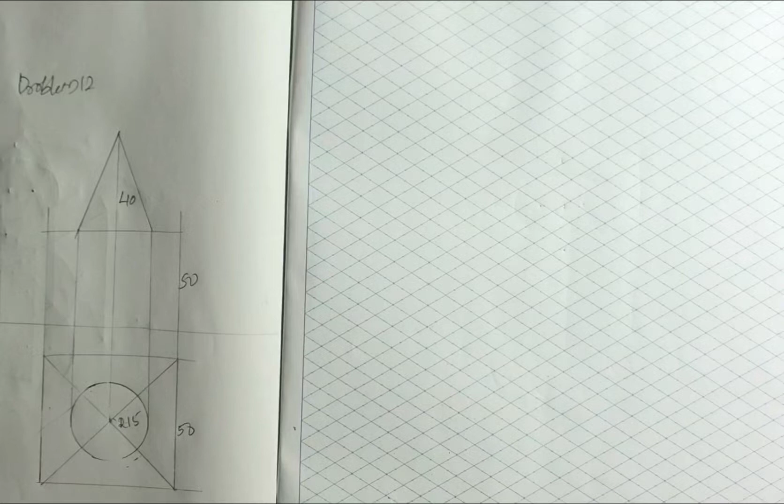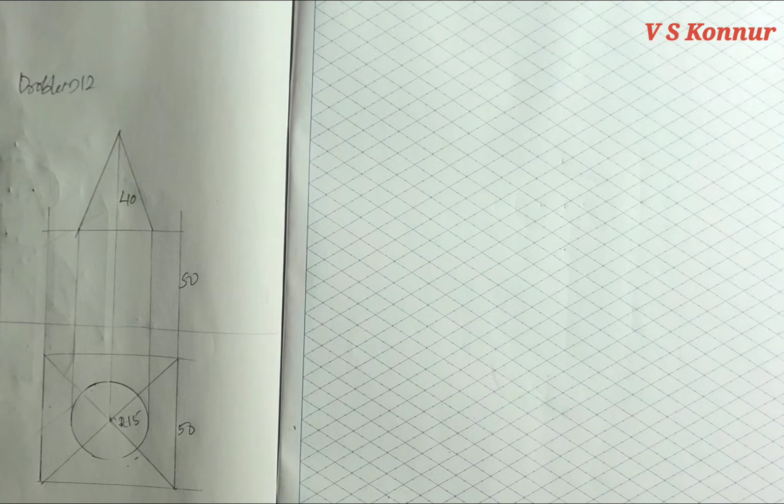This is problem number 12. There is a 50 mm cube, having 50 side and height also 50. At the top of the cube, a cone is resting. The cone has a height of 40 and a radius of 15, that is, the diameter is 30. This front view you have to draw at the beginning by taking the plan.

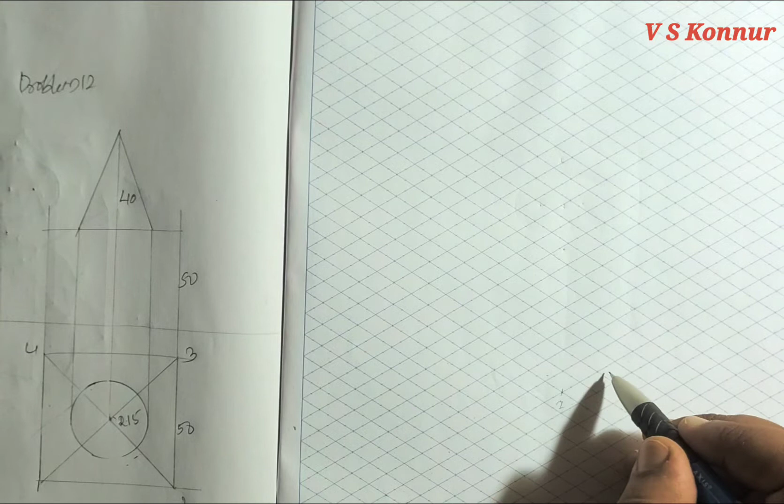First I will mark points here 1, 2, 3, 4. So here you can mark the first point. First I have marked, and it is having a distance of 50 millimeter on all the sides. 5 boxes you have to select, marking 1, 2, 3, 4, 5 on all sides.

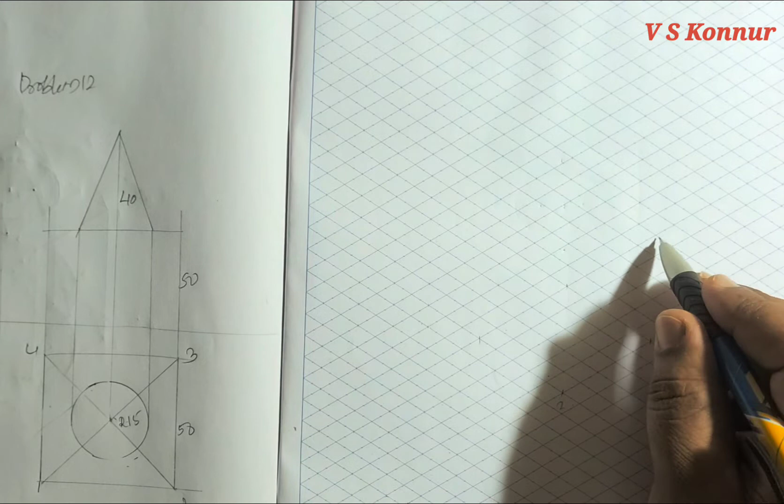And then join with the thin line. Also the height is 50, I will explain that here only. So from here if you want to take 1, 2, 3, 4, 5, and from here also 1, 2, 3, 4, 5. Exactly at this point we'll get it.

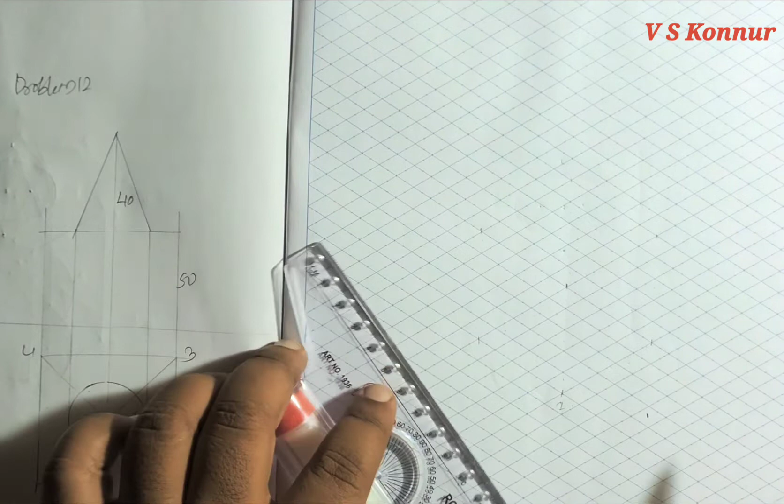So first we'll join which are important and which are visible outside. To avoid the number of construction lines, I'm just drawing these points.

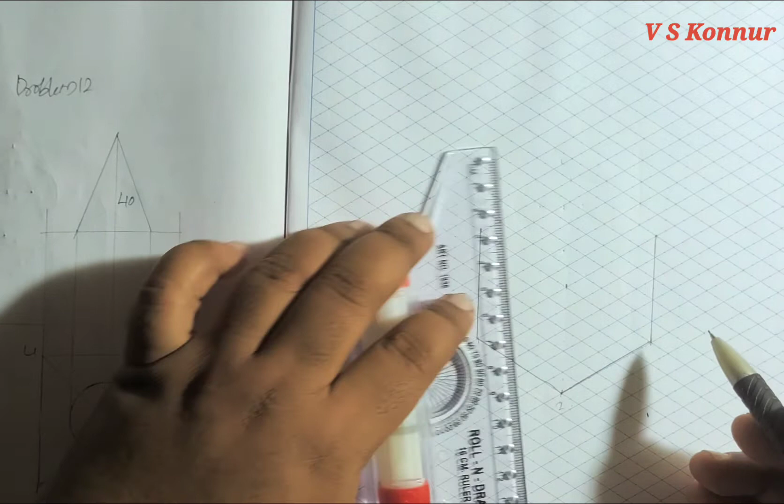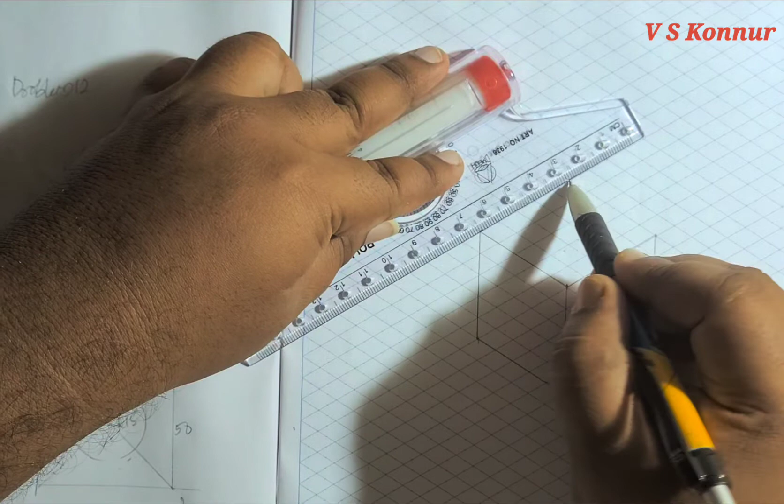So it is having 50. You can check here, all the sides are 50. This part I have not drawn because it is invisible. Instead of that, I have just made the outside lines darker.

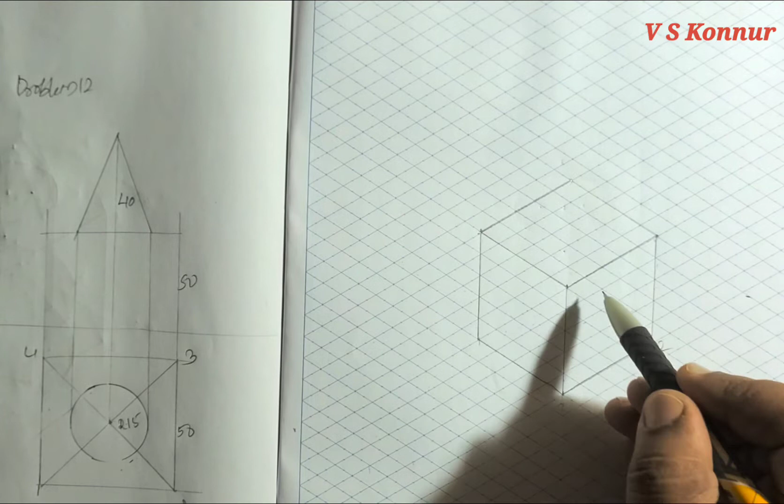Instead of drawing this line, that is first point, second point, third point, fourth point - instead of drawing 3 to 2 and 3 to 4, I have only drawn 1 to 4 and 1 to 2 for visible lines. At the top, the base is visible, because of that I have drawn it.

Now it is having a 30 diameter from the center. So the center will be obtained by joining these two corner points. So these corners we have to join, and we will get the center, which is exactly at the center of the box.

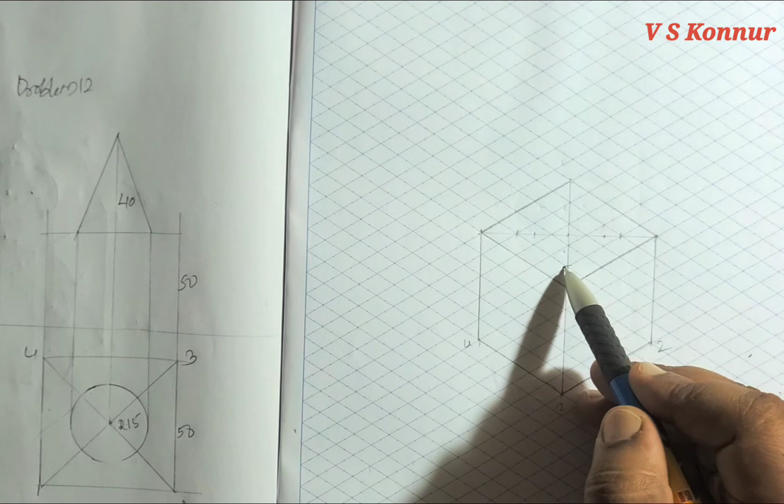From center to center, if you take, it is 10. This is 15. From center to center, 10, it is 15. Here 15 is 5 plus 10, equals 15. You can measure later, you will get 30 directly.

So just observe here, these are the lines. Thin line you just draw on that. This is a simple way of construction. Now you can check, 1, 2, 3, 30. So this is the method.

From here, center to this center is 10 plus 5, 15 on either side. So this is 5 height, this is 5, and then this is 10, 15. So that you will get the 30 by 30 plate, or you can take it as the box at the top face of the cube.

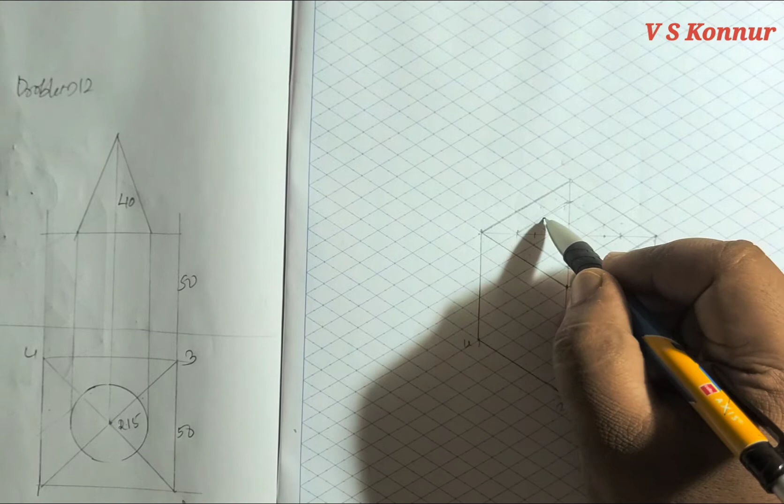Now this point to this point we have to join with the thin line. This point to this point we have to join with the thin line, center of the 30 millimeter line. With thin line I am joining, then this is the center to this.

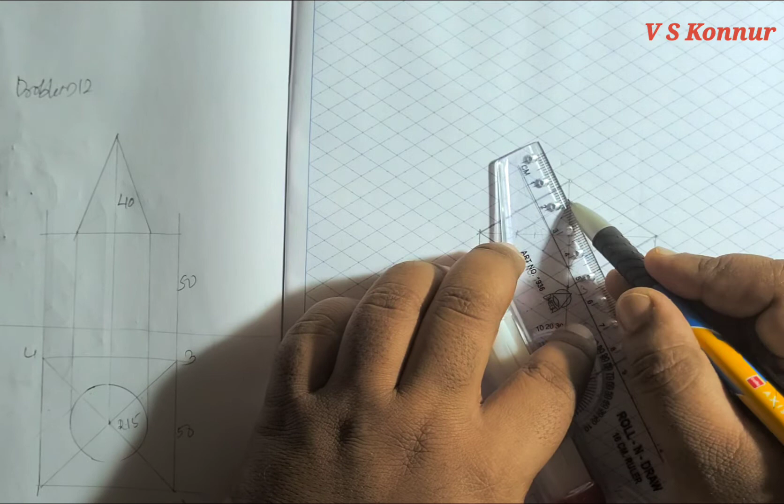Now you know the procedure how to draw the cone. Bottom will be a circle, so we'll take this as center, this as radius. We'll draw the arc, this as center, this as radius. From this point also you have to draw the arc.

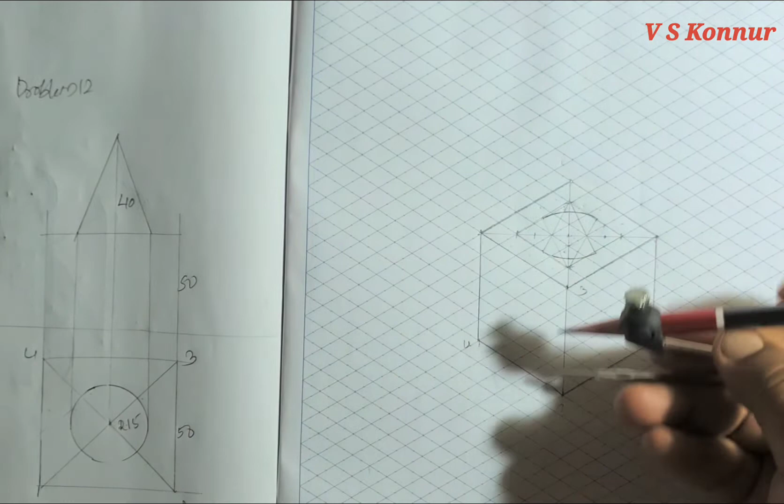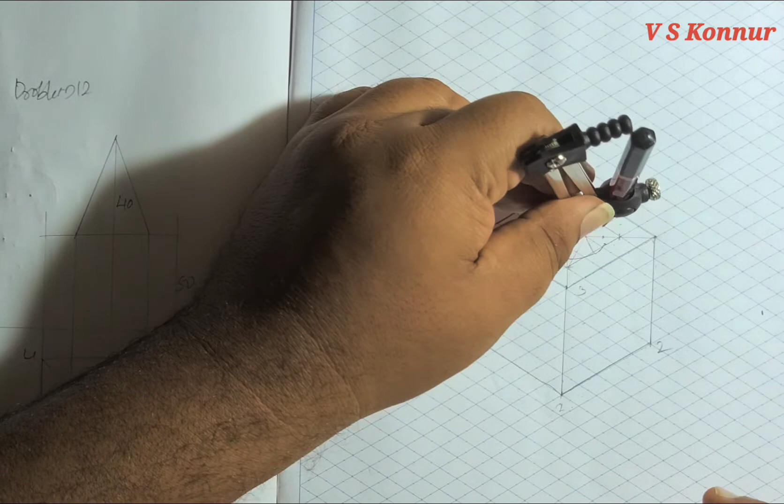It is a very small distance at the intersection. This as center, this as radius - take this as radius and draw the arc. So this as center, this as radius. You can go through the circle problem if you want, so it will show.

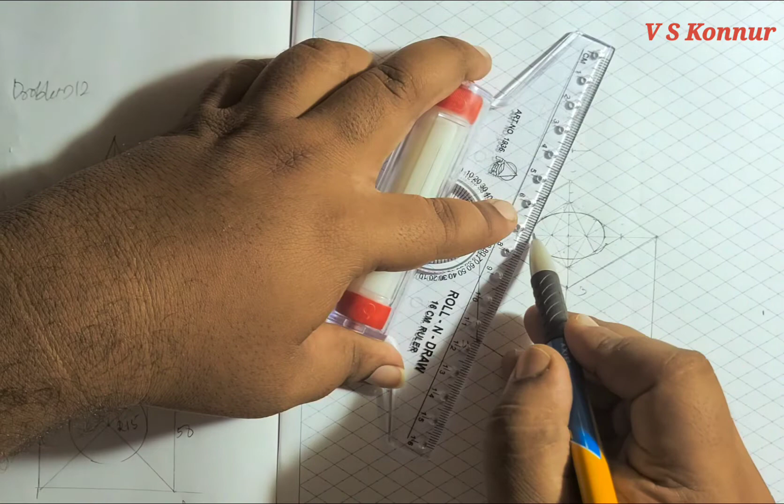Now we'll take the height. Height is 40 millimeter. From this you have to take the height, 1, 2, 3, 4. When you join these two corners, you will get the height 40 millimeter. So we'll give a tangency to this cone.

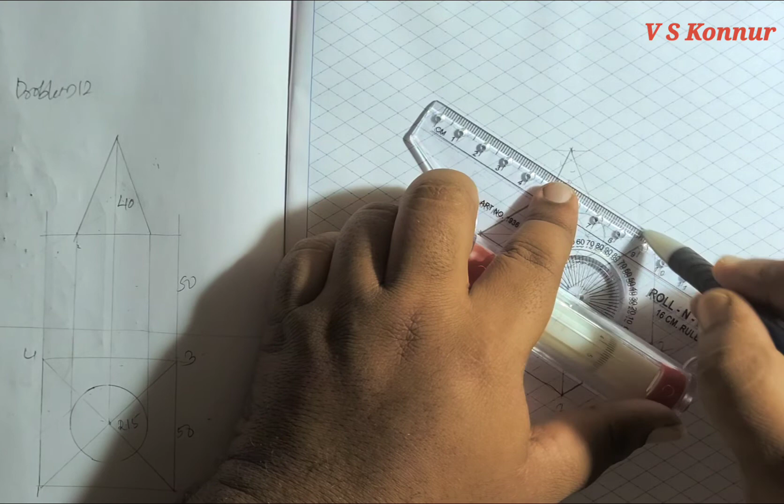Now you have to make this part dark. The cone should be made dark, this should be dark. Tangents should be made dark. Along with that, this line, the line which is till the cone, should be dark, because this part is inside the cone, it should not be made dark.

So this circle, you can remove or keep as it is. This is also dark. So this is how you have to transfer a cube and a cone which is centrally coinciding with the cube.